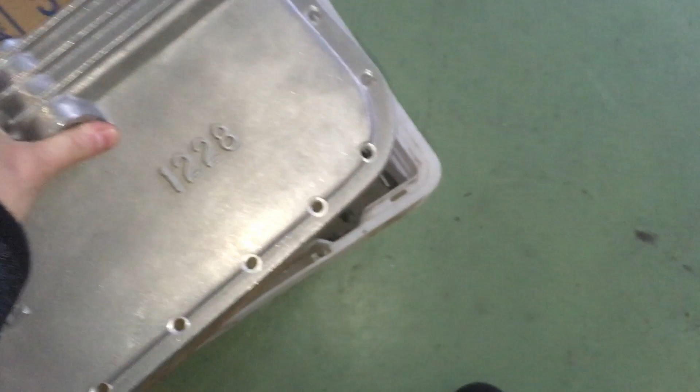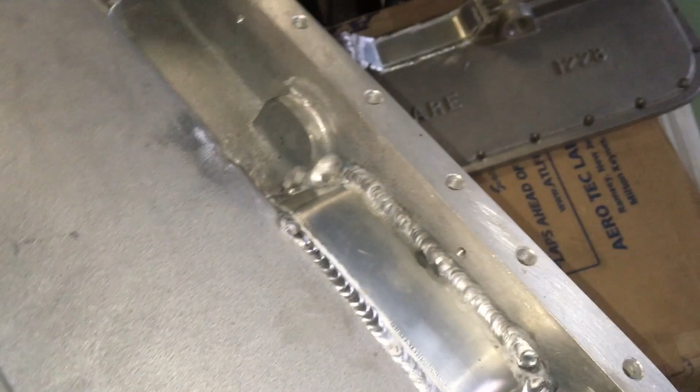But as I welded so much, and as the shape is like this, when I welded it basically warped. So now I need to resurface the pans, but I'm gonna do that on a mill, so it's not a problem. I also got my oil pans back yesterday, so we welded them and straightened them up.

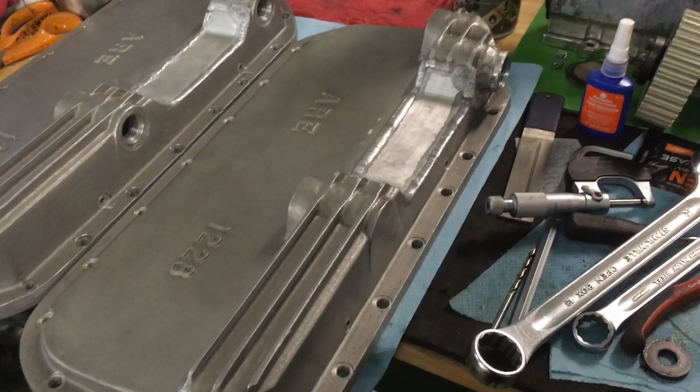So I'm still going to make one sensor location here, just to bore and tap one additional temperature measurement point. I usually measure oil temperature on the inlet of the engine. So in my case, it's actually on the little filter adapter that I've done. So this is where I measure the oil temp.

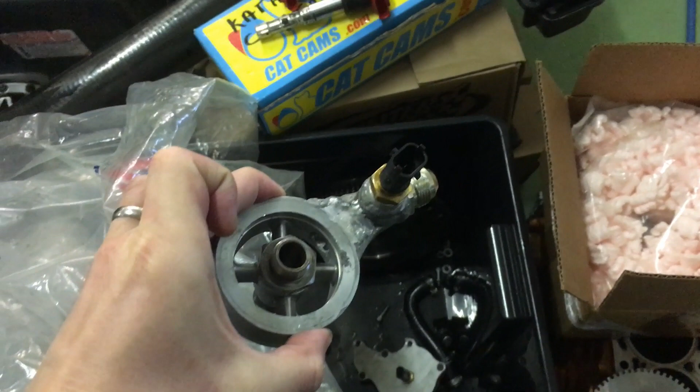So the dry sump pushes the oil through from the AN thread and then through the filter and to the block. So I don't use a remote oil filter, just to avoid one line. So yeah, I also want to see now what the oil temperature is here. This is the point where it is coming down from the engine, draining down to the sump and being sucked by the dry sump back to the oil tank.

I also have a possibility to put a sensor on the oil tank, but because I have an oil cooler and so on, the hottest point basically is here in the pan. So that's what I want to measure.

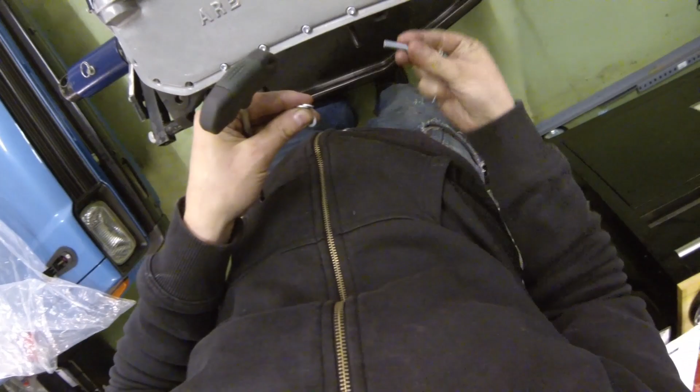Okay, let's close the coffin. Relatives have seen. That's how we say it in Finland when we install the oil pan and tighten it up so that there's no way going back.

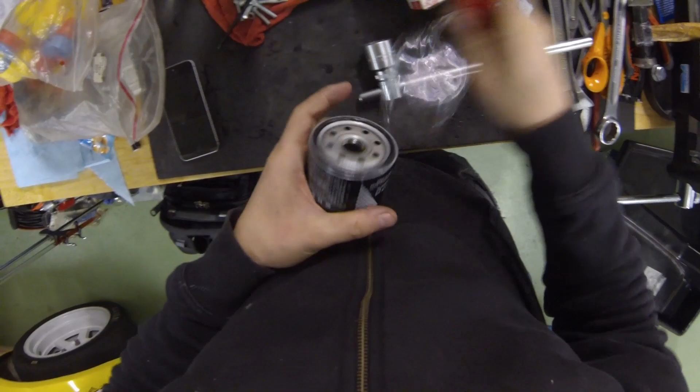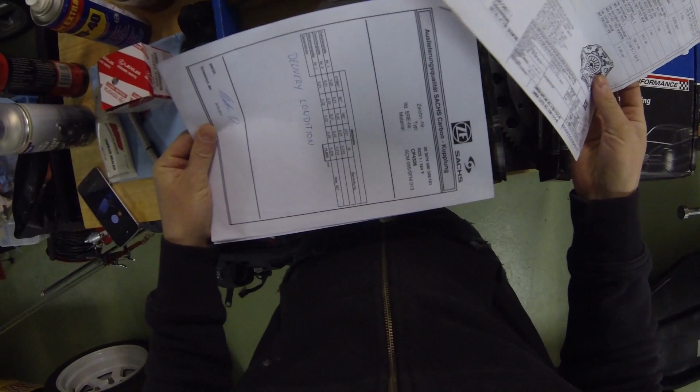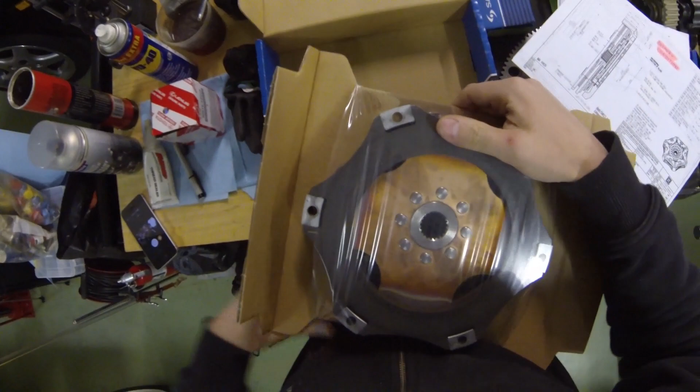So, I got my clutch back. I sent it over to ZF to be inspected. This has been in the car. The first race I drove with this clutch was Mount Washington 2017, so it's been in the car ever since. And I wanted to know if it's all good with it.

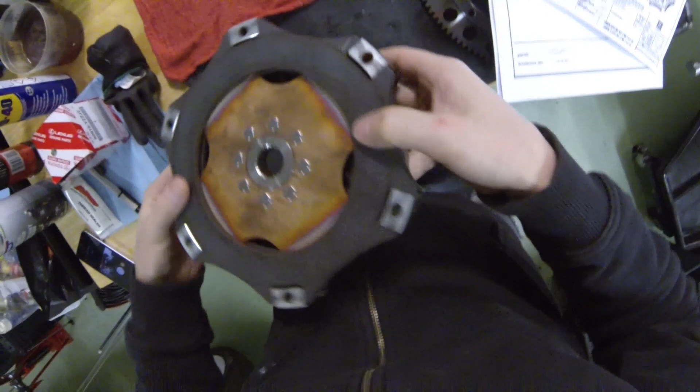And the guys at ZF measured the clamping load and verified that it's all good. So the disc is in very good condition. There's no need to do anything for the clutch at the moment.

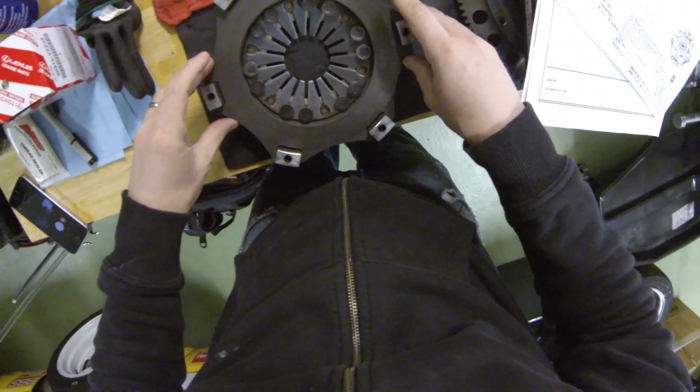So the nice thing about this clutch is that it has a separate adjuster ring. So actually you can change here the contact point for the spring, which changes the ratio and which changes the clamping load. So I've got two settings for this.

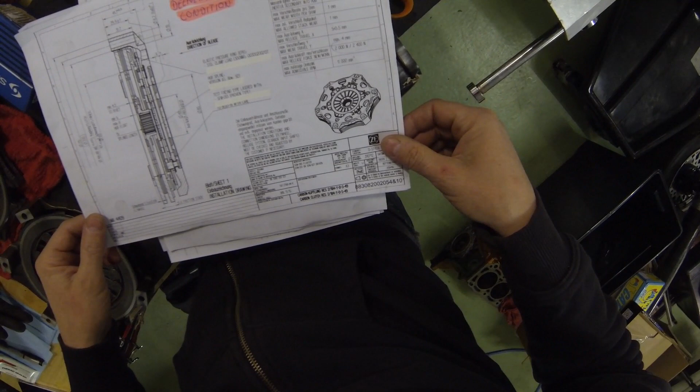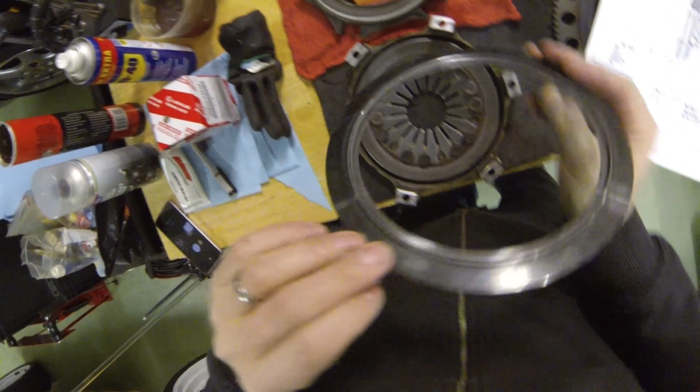It should be mentioned somewhere. Oh yeah, here. So the low clamping load is 240 newtons and the standard is 300. So I've been using the 300. Yeah, this is the 300 option I have here now.

What I also have is, so here this is the second spring, and here I've got another friction material. So this is slightly different than the one I'm running. This is now a little experimental, to try these out.

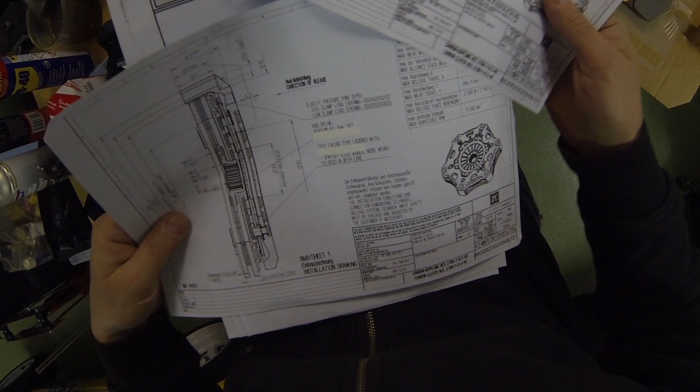SF27. Yeah. So this SFM 027 has less judder, more wear, to bed in with care. So this I haven't tested in the car yet. And then the one we have in here is a proven type, SFM 013. So it's pretty cool.

Got some really good friends that helped me with this stuff. Very happy about it. Not to mention the names, but thank you very much.

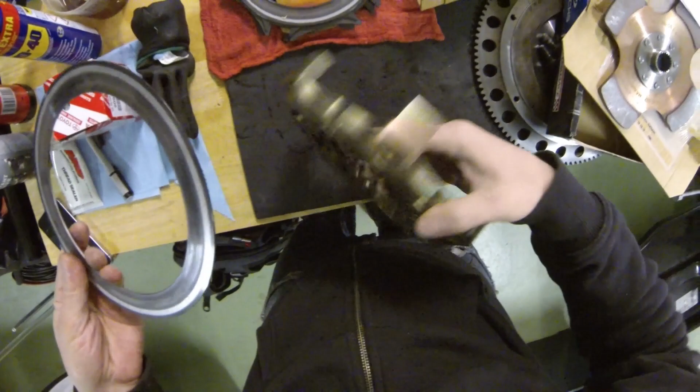Yeah, so I'm just gonna clean all the parts. Has a little bit of dust here and there, so just gonna clean them and then assemble the clutch. Next step is I'm gonna pull the engine. I assembled the engine yesterday. It's now ready. So I'm gonna take the engine off the stand, put the flywheel on, put the clutch in, and then get ready to put it back in the car.

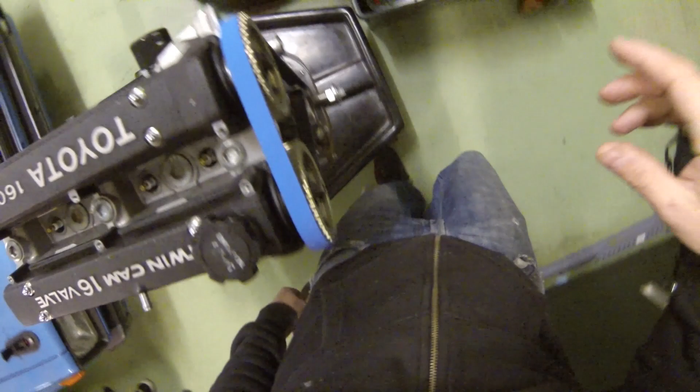So I'm gonna fabricate some new engine mounts and things. So I'm not gonna put the auxiliaries on it, because I can more easily access the engine mounts. Then once I've fabricated all, I'm gonna put the alternator, oil pump, etc. and finish the engine. But it's still gonna come out of the car.

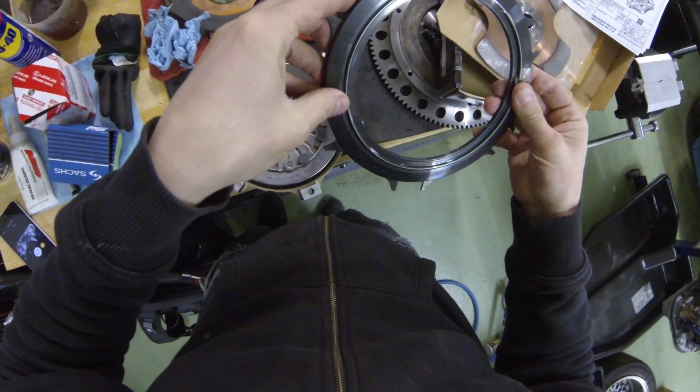So all these parts have a mark. Also there's marks in the housing for how it should be assembled. And now the spring plate, or this elastic pressure ring, is in the groove properly.

So the carbon I don't really want to clean up. I'm just gonna use a little bit of air to get the dust out of it, but I'm not going to use any brake cleaner or any solvents on the carbon.

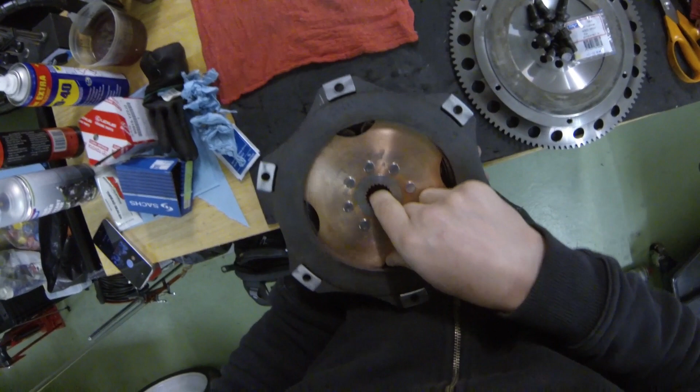That's it, then it's ready to go. I used earlier an Alcon clutch, so I got a 2.5mm step on the flywheel, so this is now made to match the flywheel that I have. So in theory, as a backup clutch I'm still using, if I would ever have a problem, I can switch quickly back to the Alcon, so I have a spare clutch.

So one of the key differences with the clutches when I switched over from the typical Alcon clutch to this one is that the pedal feel and how the clutch releases and the biting has way more feel with this clutch. And now, especially with this experimental disc, it should be even better. So we'll see.

So now I'm a ZF clutch salesman.

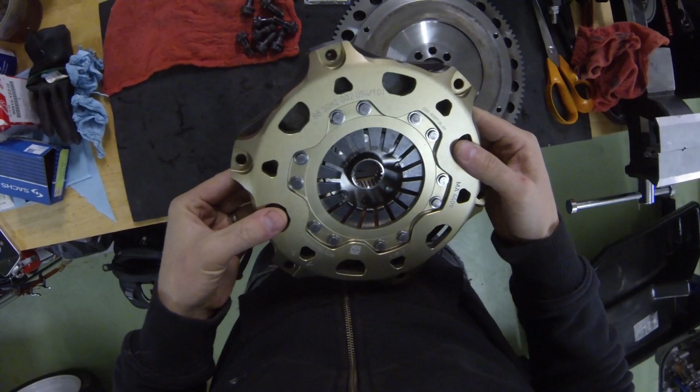One thing I forgot to mention, this ZF clutch was actually, I think, 1.3 kilos lighter versus the typical Alcon, with the same diameter and everything. So I think the Alcon is a little bit overkill when it comes to the clamping load for such a small, high RPM, naturally aspirated engine, which doesn't really make torque. And the clutch housing is very heavy on the Alcon.

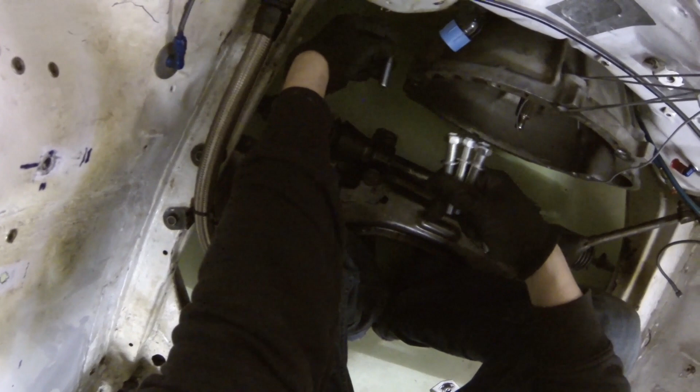So I purchased new bolts for the starter motor and to hook up the gearbox to the engine block. So these are original Toyota. They have a smaller tool size, so as this is very close to the firewall here, it's easier to use the smaller 17mm tool than the 19mm. So there's shorter ones on the top and then the longer ones come here. Just gonna be a little easier.

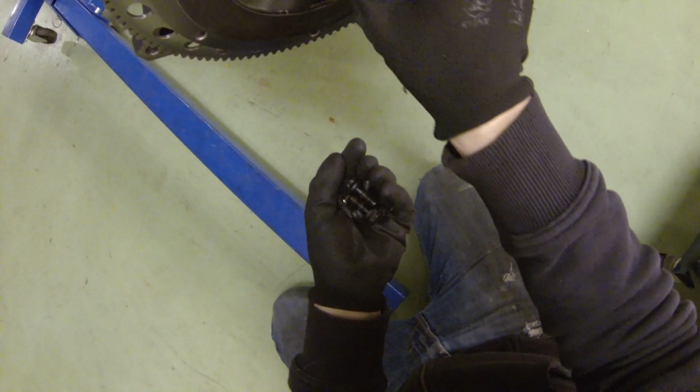So I'll just put a few bolts in here. Going to tighten this up with the thread locker. So I've run out of Loctite 242, so I'm gonna use Permatex red on the flywheel bolts. And this goes in the thread, and then you want to put some moly lube on the washer, or there's not going to be a washer, but on the contact surface.

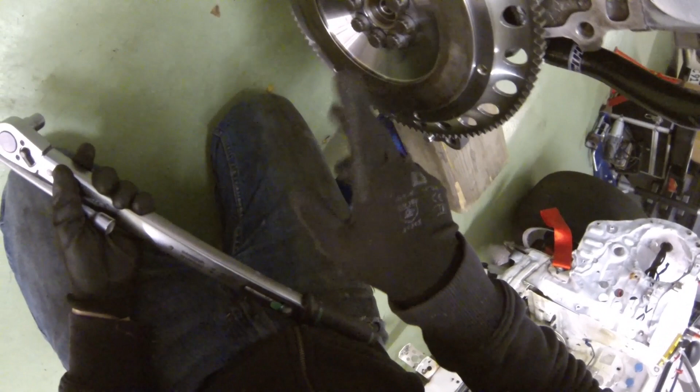Okay, I have to clean all the excessive moly lube from here, otherwise it's gonna spread all over the place when this is gonna spin 11,000 RPM.

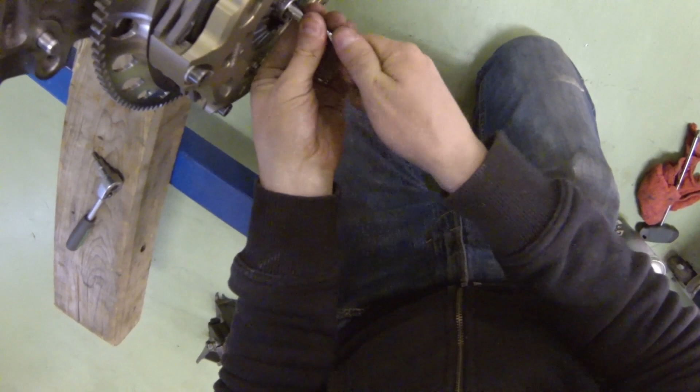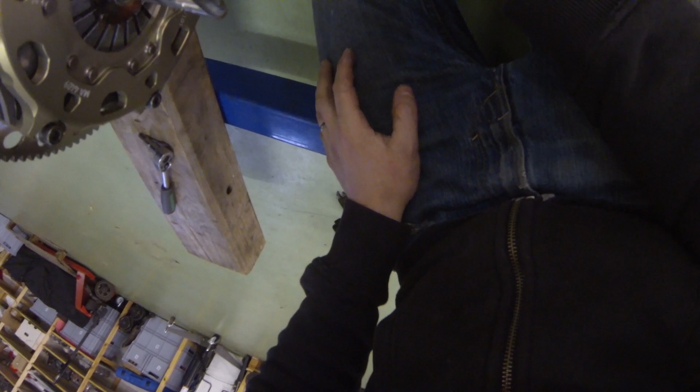Okay, so I couldn't find my tool for centering the clutch disc, so sometimes you just have to find your inner MacGyver and figure out something. So I used a 12mm bolt, a 14mm half-inch socket, which fits perfectly into the clutch disc and has a 12mm bore inside. So this is pretty tight, and I'm quite sure it's well centered. But we'll see it soon when I try to drop the engine in.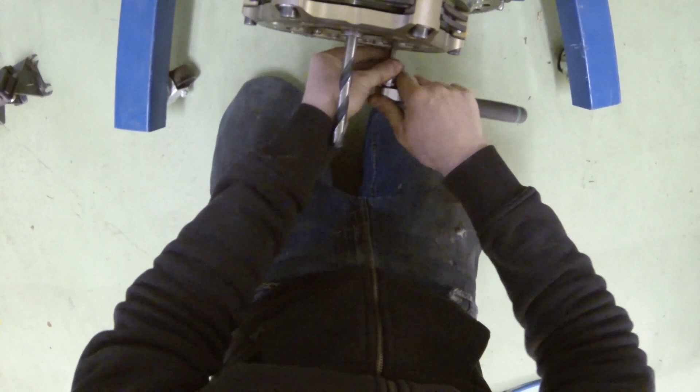So the thing which really annoys me is I spent, I think, an hour trying to find the tool. I couldn't find it. However, I was able to find some stuff that I've been looking for, so it was not a complete waste of time, but it still really annoys me. The engine would be already in if I would have found the tool right away.

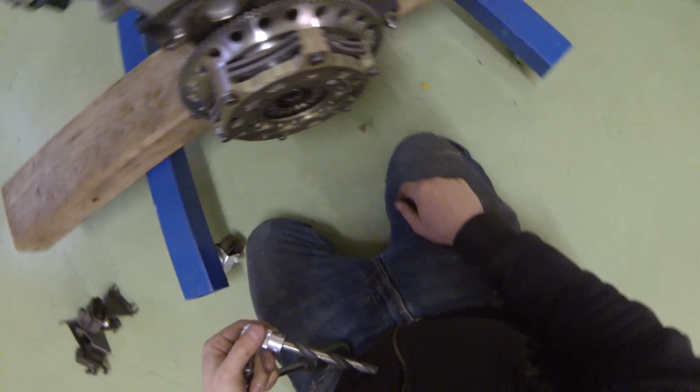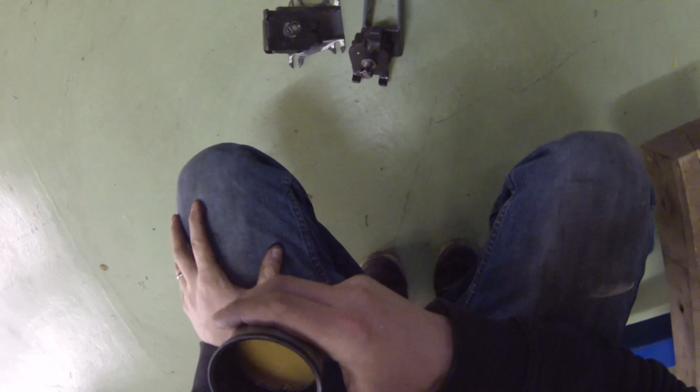So I've used these T3 brackets before Pikes Peak. I was really in a rush to get the engine in the car. I ordered these, modified them to get the engine sitting further back than these originally are. They are not very pretty. They are also very heavy. Plus the engine still won't sit in the right place, so now I'm going to finally fabricate some proper engine mounts.

Okay, so that's how much space I have between the clutch spring and the release bearing when it's fully pushed back. So there's definitely enough.

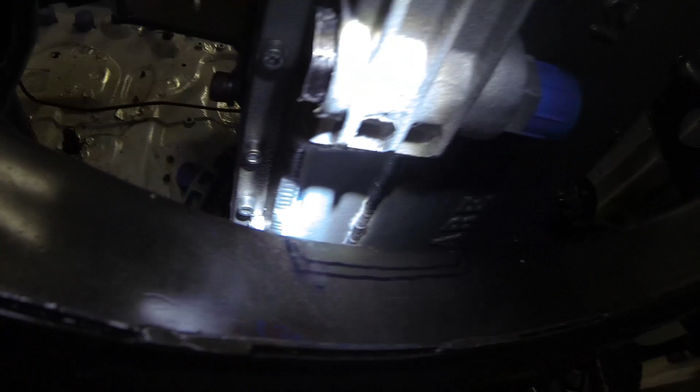So as you can see now, the modification I made for the oil pan allows me to drop the engine maybe 2-3 centimeters and actually move it also further back. So I think I'm gonna get it maybe 2 centimeters back and 20-30 millimeters down, which is gonna be great for the weight distribution. So this is still the original cross member in the original location.

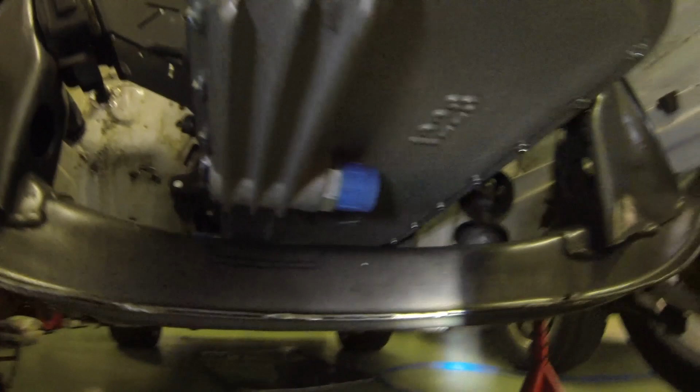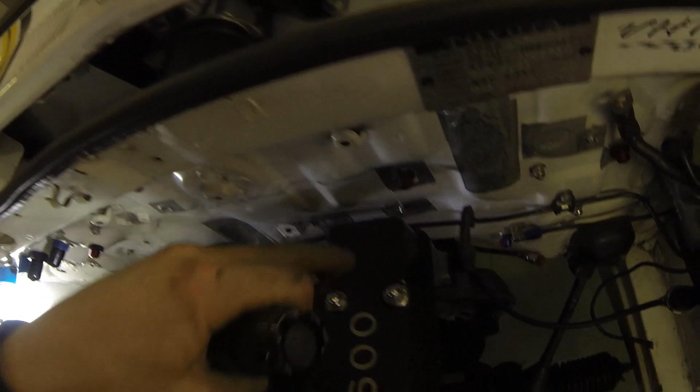So I need to move the cam sensor from the back of the cylinder head, because that's now my limiting factor here, moving the engine rearward. So I'm gonna make another trigger wheel configuration and sensor location, most probably here on the top of the valve cover, to read the same trigger that I've built into the cam, but just move the sensor.

And since the engine moves lower, there's gonna be much more space on the transmission tunnel, which is not bad at all, because it's pretty tight to get the fingers in there if you need to remove the gearbox.